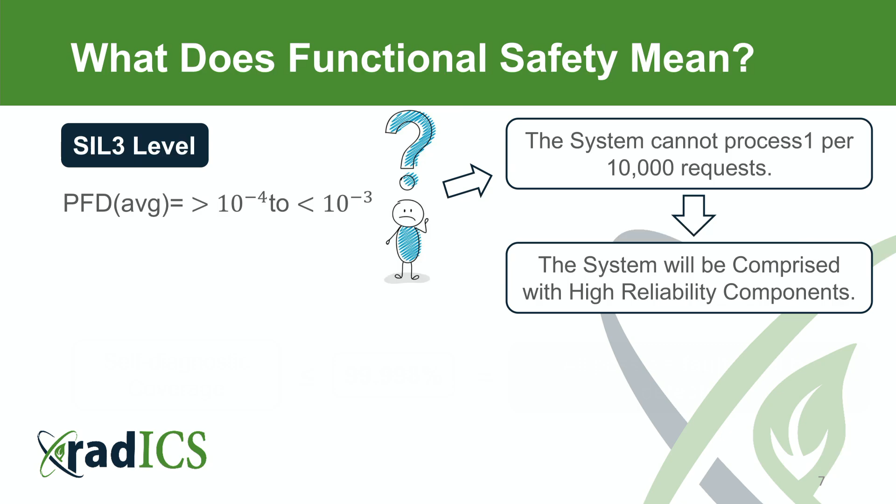For the system, it means that the system should include just reliable components, and the system shall have self-diagnostic coverage better than 99.8%. Such a system will allow you to detect all possible faults. And in case a critical fault has occurred, it happens sometimes, the system will go to the safe state and no damage will be done.

Let's consider some examples from real life. What is reliability? It's a 30-year marriage. What is a safe state? Safe state, for example, the kettle. No water, the kettle is switched off. When we talk about self-diagnostics, let's consider the situation with the car. All of you are drivers or passengers in a car. And many cars have a sensor named the tire pressure monitoring system.

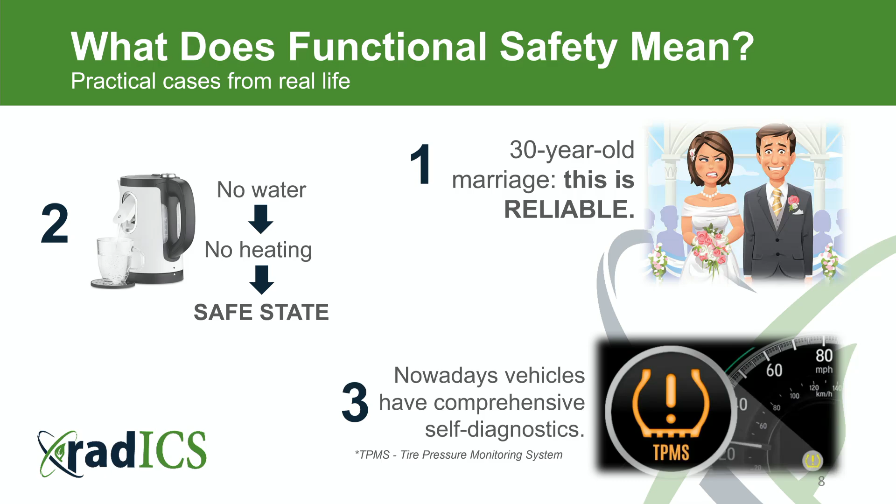Of course, the car will work without it, and it will be a really good car. However, what do you prefer? To see such a difference and find the nearest pit stop at the start of your trip, or stop the car in the middle of the highway because of a flat tire?

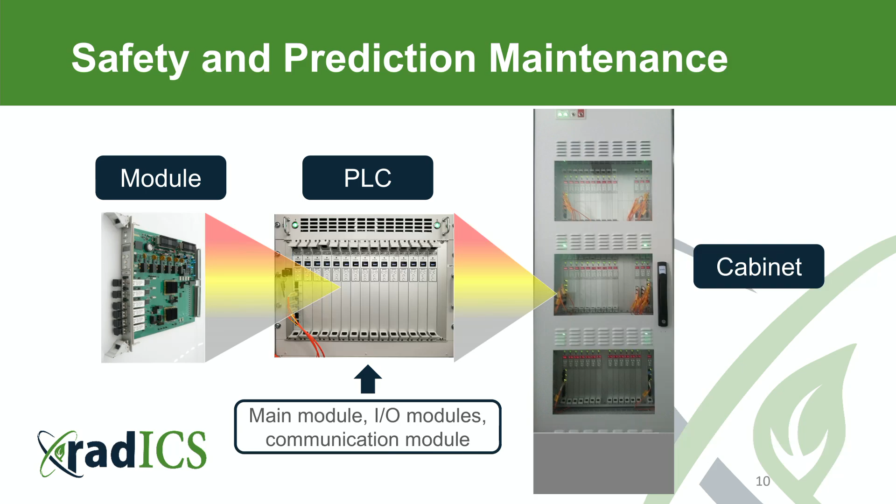So we discussed safety and self-diagnostics, but safety, self-diagnostics, and maintenance are also connected together. When we talk about I&C, I&C includes cabinets. Cabinets include a programmable logic controller or chassis. The PLC includes different types of modules which receive, process, and send information to other systems, or control different types of processes at the nuclear power plant.

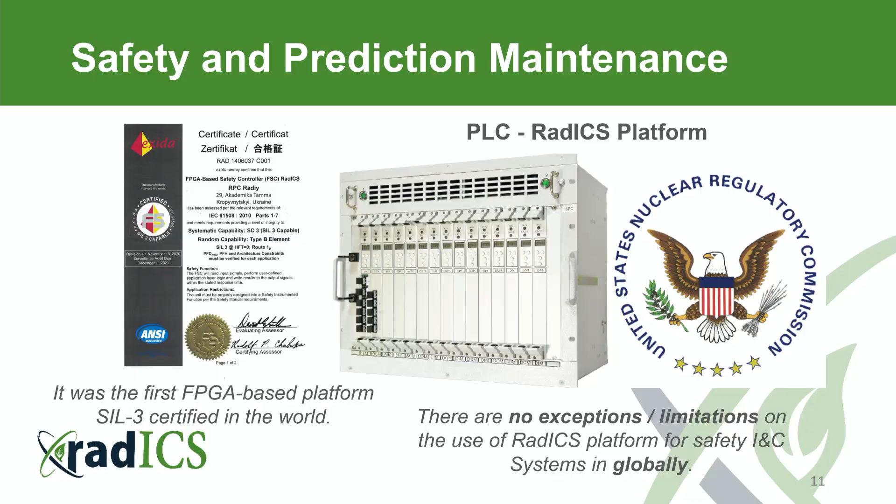Our I&C system is based on the RadICS platform. The RadICS platform has a safety level of SIL 3 in one channel. It is an FPGA-based platform, and it has the acceptance of the US NRC for use in safety I&C systems in the US nuclear market.

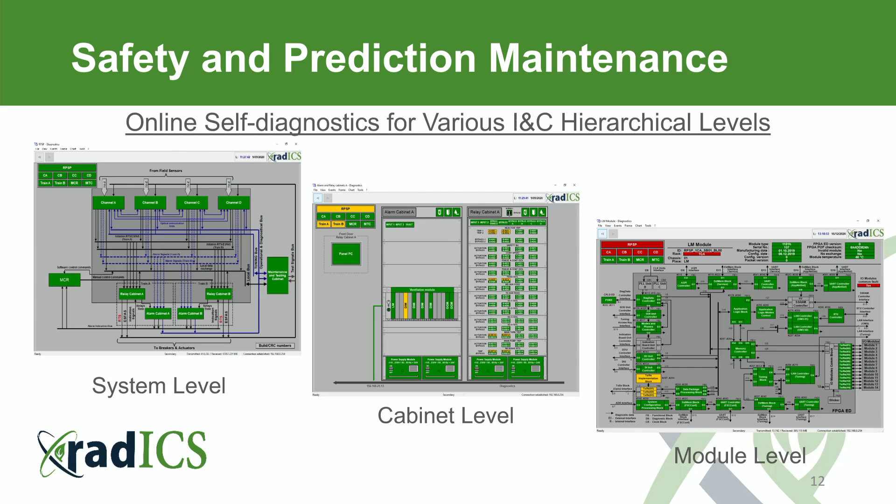This platform has self-diagnostics at different levels. The first level is the system level. The second one is the cabinet level. And the third, each particular module. I would like to show you some practical cases related to it. This is our baby. This is our platform.

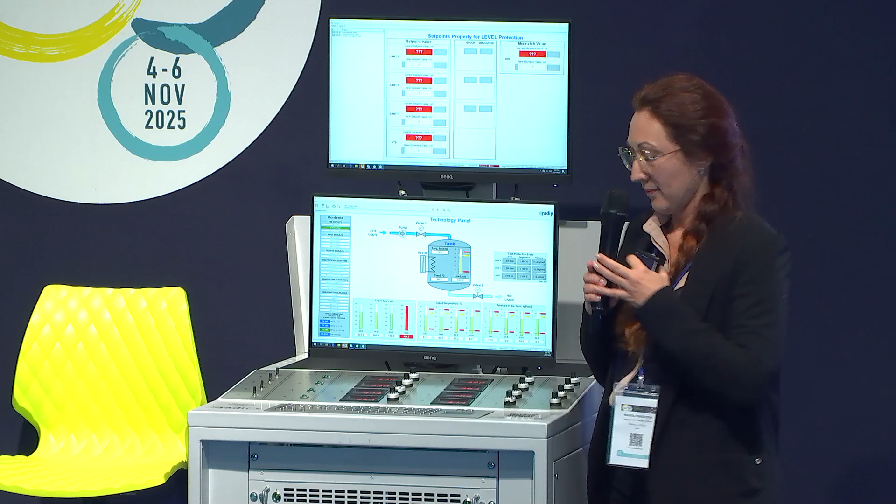So the first case, let's imagine that one of the sensors in the reactor is out of range. It means that our system shall react to it. There will be such a reaction at the system level. You can see it on the screen and on this screen too. Also, we can see it on the module level.

Give me a second, please.

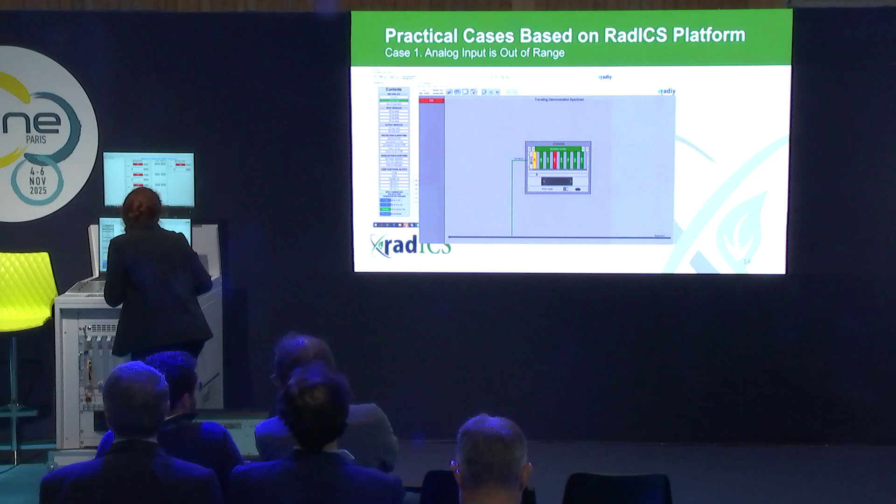Okay. Alexander, where are you? Please help me. Where is the mouse?

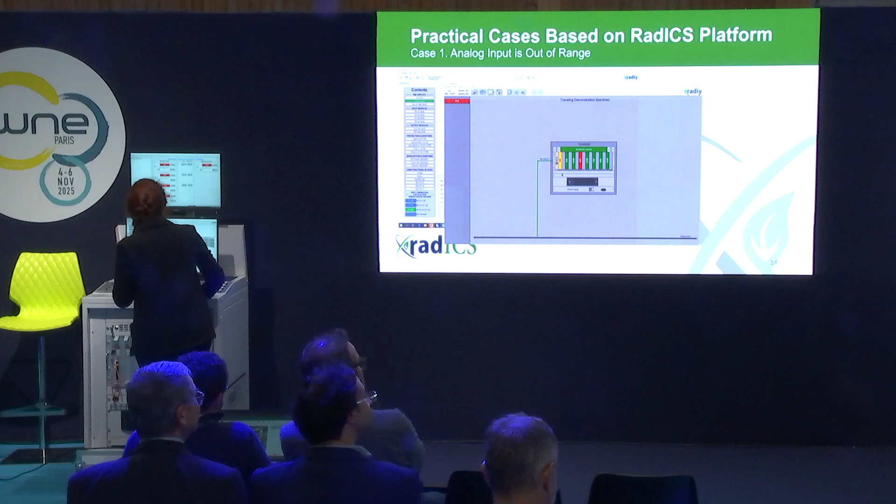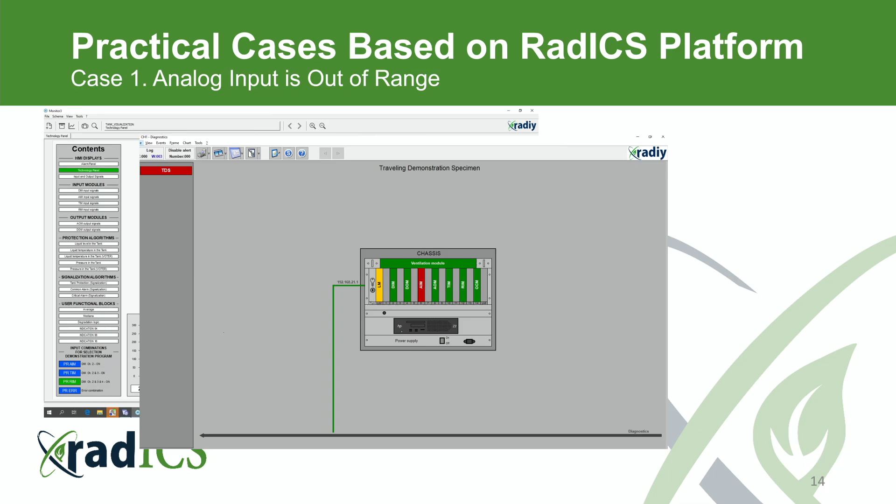Okay, let's consider on the system level. We will show you a little bit later. And of course, when we open the module, we can see it on the module level.

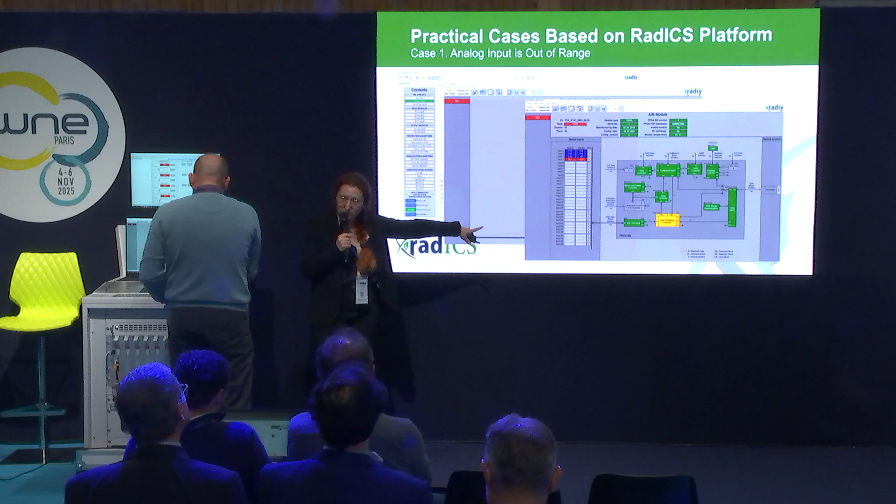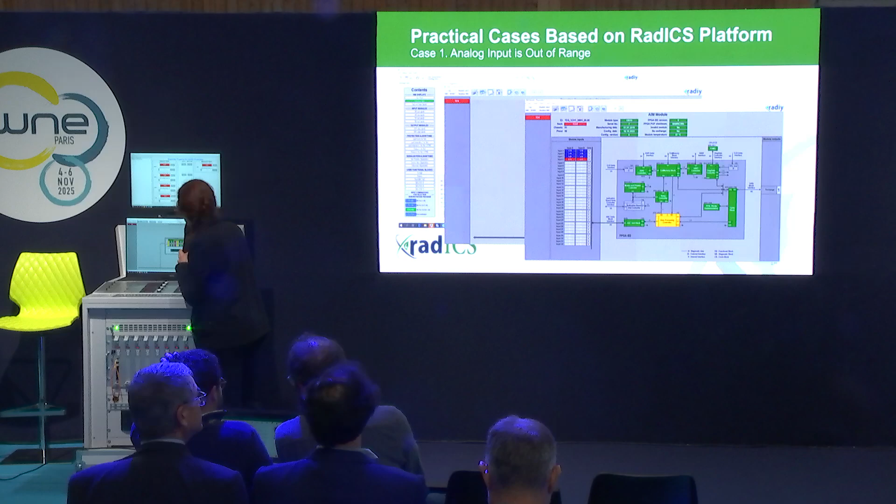So everything is okay. It was not the safety system. It was just a mouse for computer.

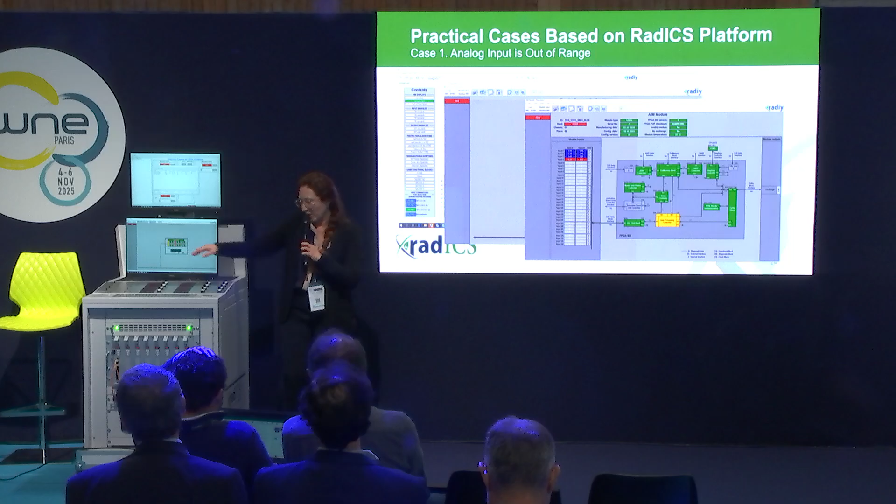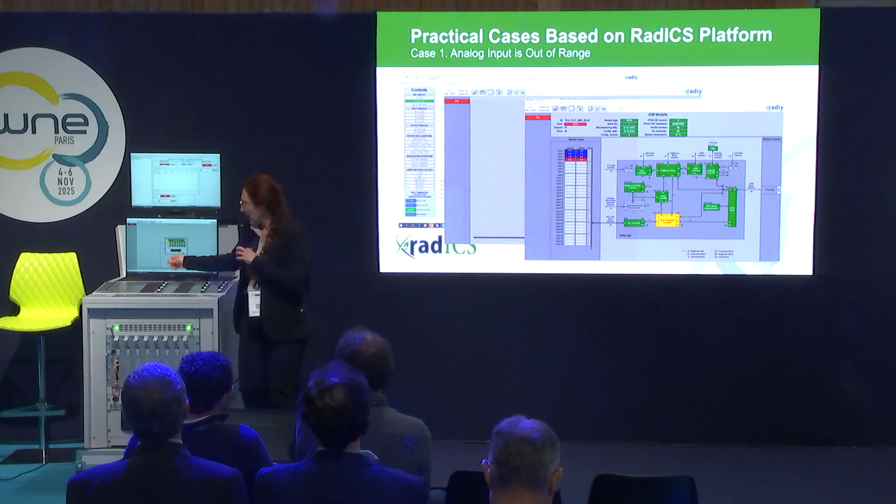So we can see such type of picture. When we open, for example, analog input module, we could see what exactly goes wrong, that such type of signal was out of range. So let's return it back to the normal parameter.

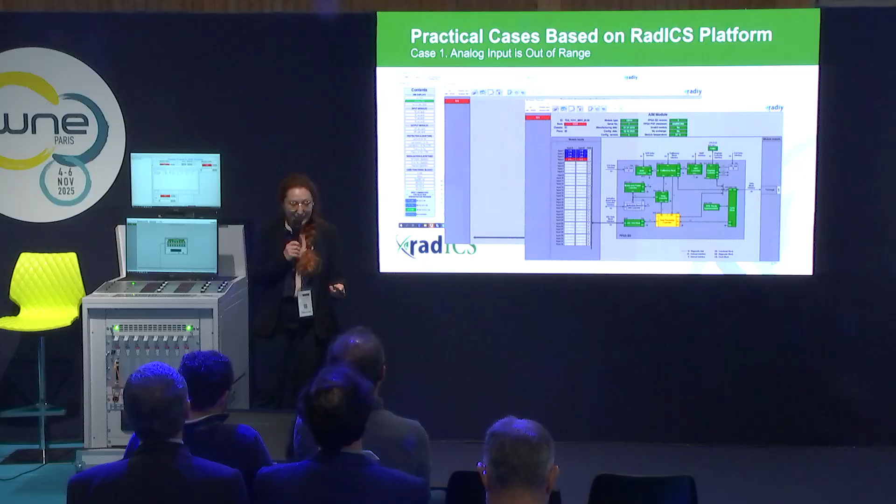And everything is okay. The second case, for example, is the loss of communication. If we lose one of the optical connections, we can see the alert on the logic module. It is not a critical fault, because we can see just an alert, not a fault. And when we open the logic module, we can also see what exactly goes wrong.

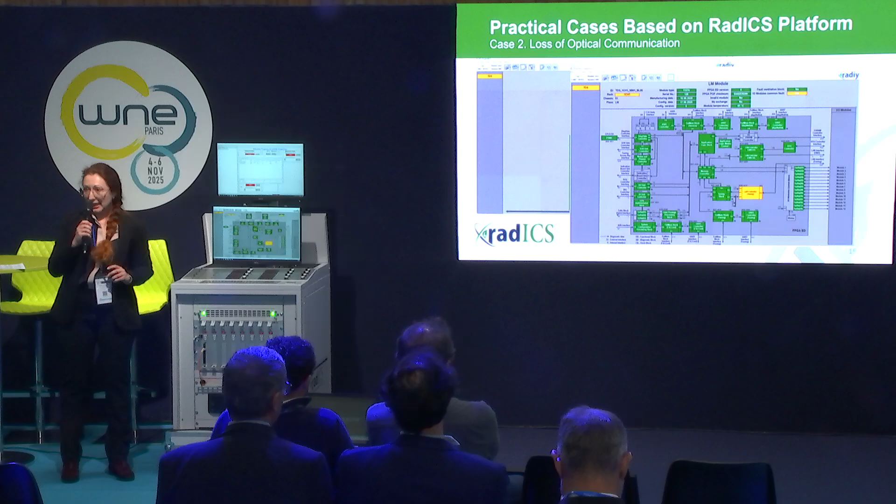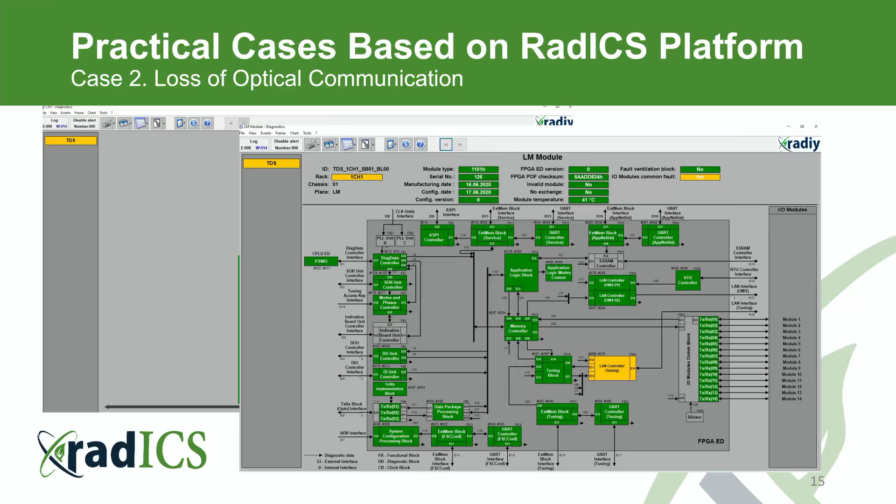Let's return it back. And the system goes to the normal operation. And the last case, let's imagine that one of the modules was damaged. What we will see, the system also should detect it. We can see that logic module is red, analog input module which was damaged is also red, and this is critical fault, and it means that the system shall go to the safe state.

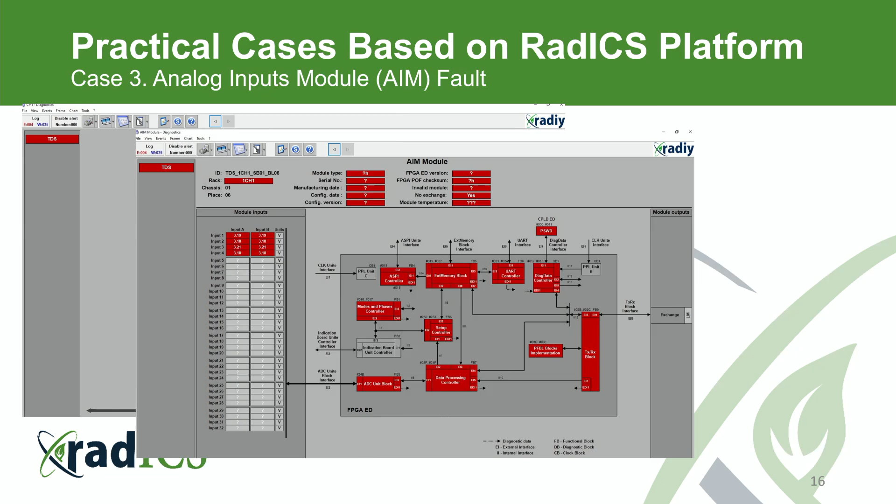When we open the analog input module, we can see that everything is red, it is broken. And when we open one of the output modules, we can see what happened exactly.

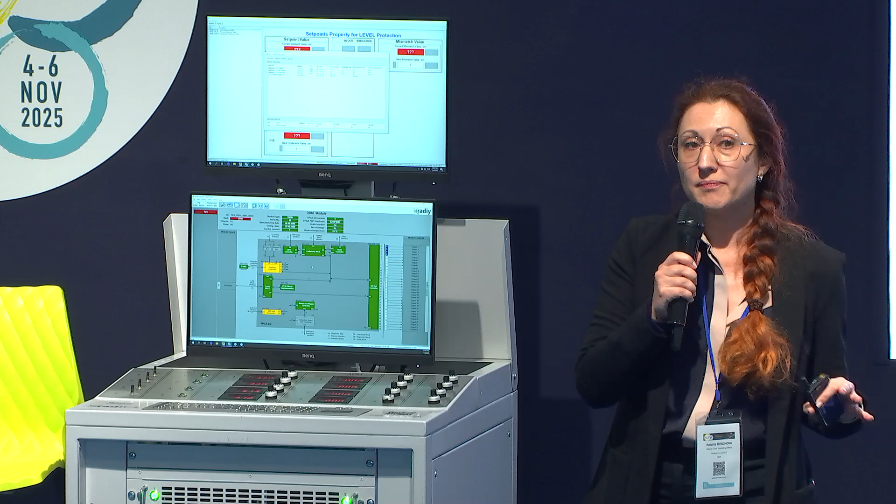So we discussed maintenance, safety, and self-diagnostic. But where is investment in this chain? You know that all equipment at nuclear NPP shall be tested regularly. The type of tests, the quantity of such tests depends on the type of reactor, the equipment, the regulatory policy in this particular country, the work instructions at this NPP, etc. However, there are some common types of testing which will be used in each NPP.

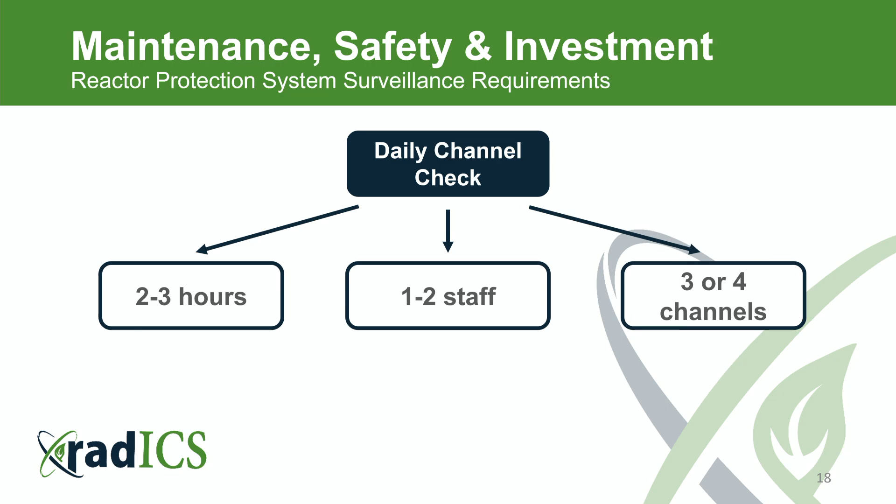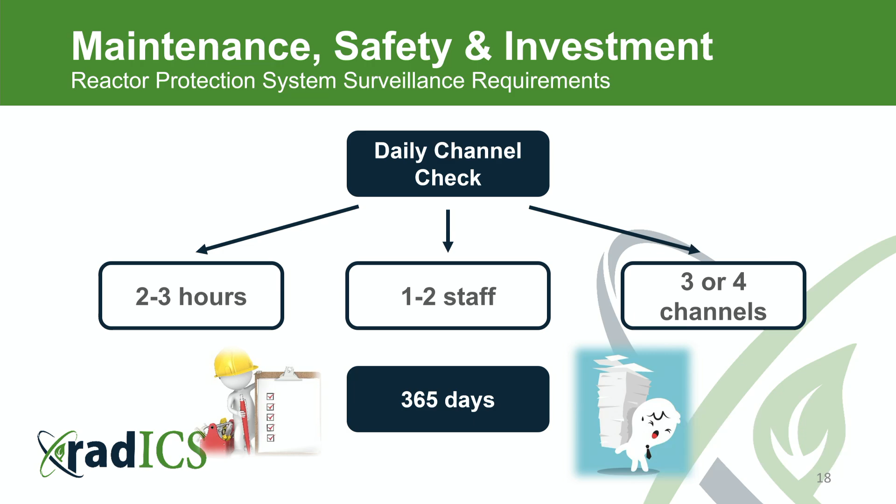The first one is daily check. Let's consider the situation that we have the analog safety I&C system, for example, reactor trip system. It means that for such type of system, we shall perform every day the testing, daily check, during 2-3 hours. We need for this testing 1-2 staff, and we shall perform this test for each channel in the nuclear power plant, and quantity of channels depends on the system architecture. And it means that these 2 people every 365 days should fill out a lot of paper, not just perform the work, they also should prepare many papers.

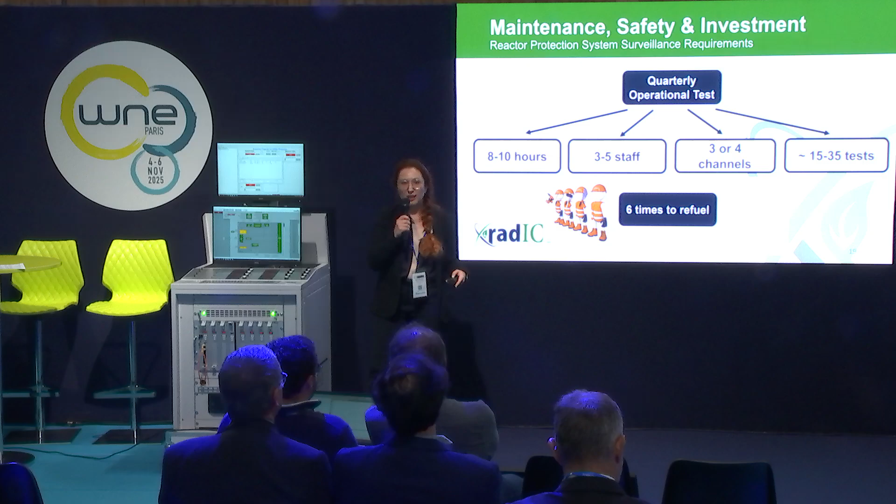Another most common type of testing for all nuclear power plants is quarterly testing. This type of testing takes on average from 8 to 10 hours. It takes 3-5 staff to perform such a test for all channels. And the quantity of such functional tests is from 15 to 35 tests. And of course, these people should fill out a lot of paper.

Let's consider how we can translate it into hours and money. For daily check, it will be 2 hours, 2 people, 4 channels, 365 days, and it will be almost 6,000 hours. For quarterly check, it will be more than 10,000 hours. Let's consider $100 as a payment cost for 1 hour. It will be $1,600,000 per year. But if you use the safety I&C system more than 15 years, it will be more than $24 million. You can tell me that it's not so big money for safety.

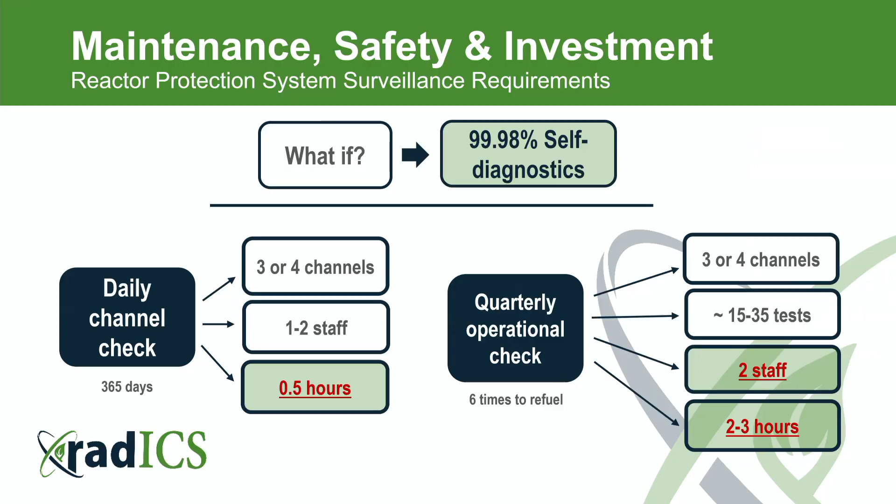However, what if you have the system with comprehensive self-diagnostic? The daily check could be reduced to half an hour. The quarterly check could be reduced to 2-3 hours, and you need just 2 people to perform such testing. And of course, these people should work just with the diagnostic computer, and all results of the tests will be saved automatically. Let's translate it into hours and money.

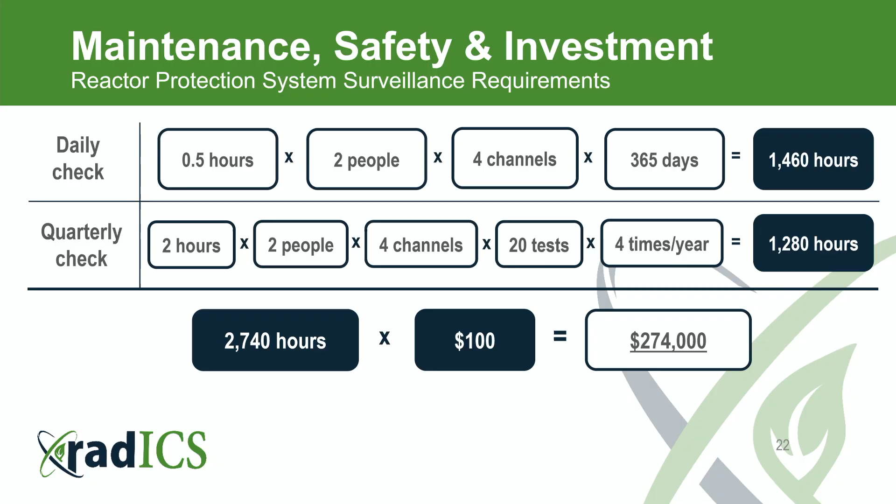It will be 1,400 hours for daily check. For quarterly check, it will be just a little bit more than 1,000 hours. When we translate it to money, we can see that it will cost just $274,000. For 15 years, it will be something like $4 million. The difference is amazing. You can see that time will be reduced 5 times. And in money, the difference will be more than $22 million for 15 years.

I understand that $20 million for 15 years for nuclear, it's not so big money. However, if you have 20 million, better give it to me. I know how to spend it.

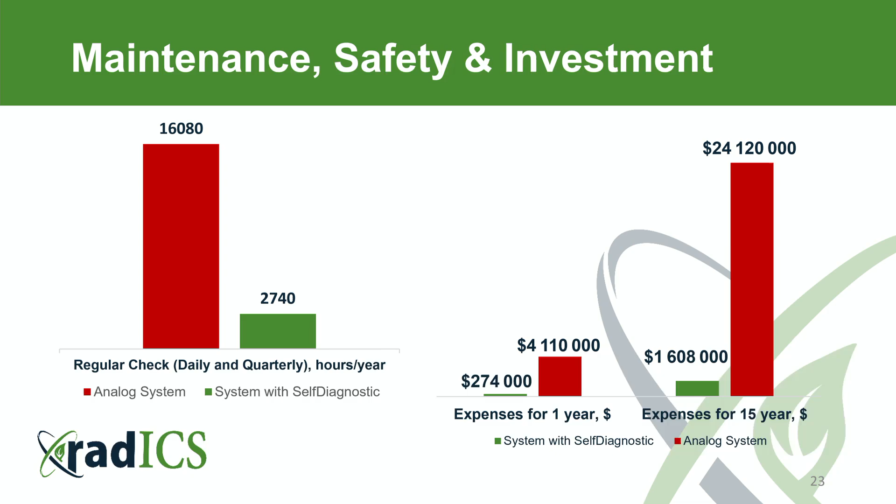So the solution is obvious. RadICS platform for I&C modernization is a good solution. RadICS can bring you money.